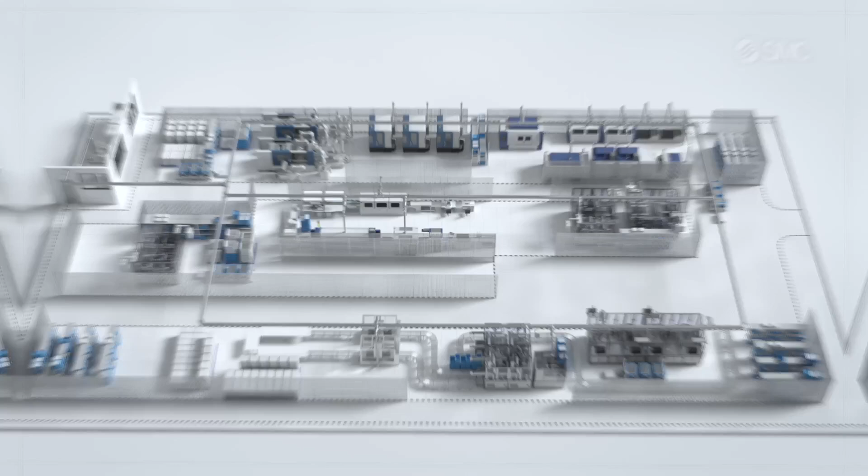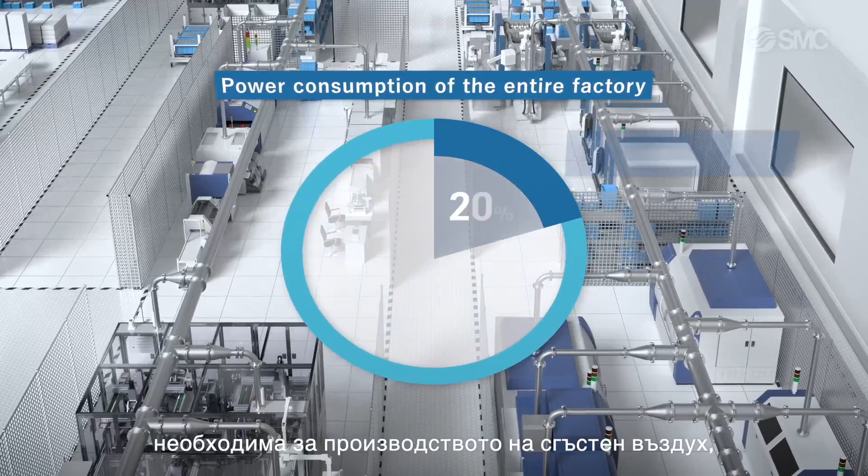Compressed air is commonly used in factories, but its production cost cannot be ignored. The power consumption required for air production is estimated to be 20% of the total power consumption for the entire factory. Conventionally, various measures have been taken to reduce air consumption.

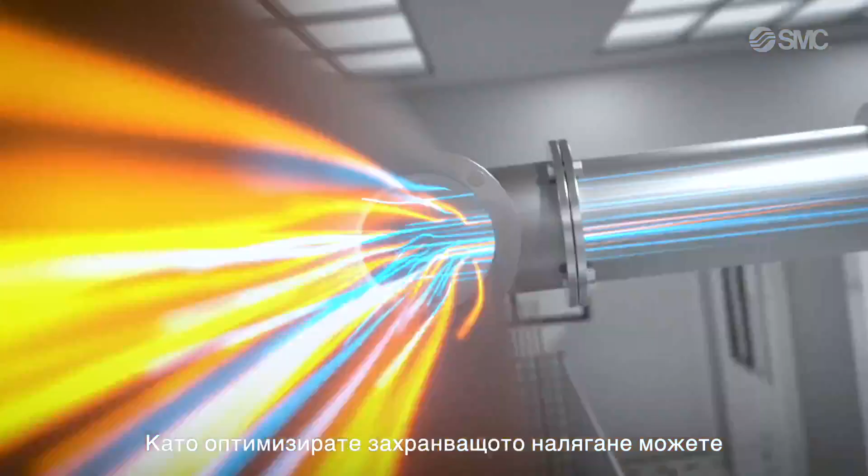However, SMC proposes a method to fundamentally solve the problem by optimizing air pressure. By optimizing the supply pressure, you can save energy and reduce CO2 emissions at your factory, efficiently achieving next-generation air design through best practices. This concept is achieved by 4-bar factory.

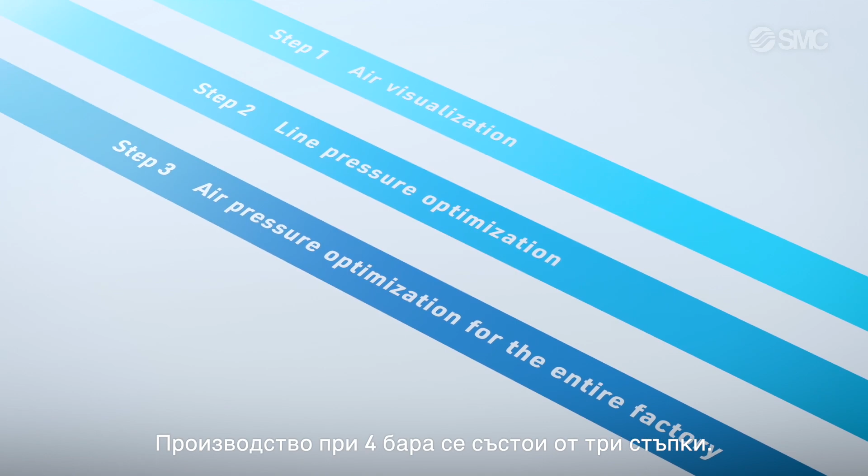4-bar factory consists of 3 steps. Step 1: Air visualization. First, we visualize the pressure and flow rates of existing equipment to identify areas that can be reviewed.

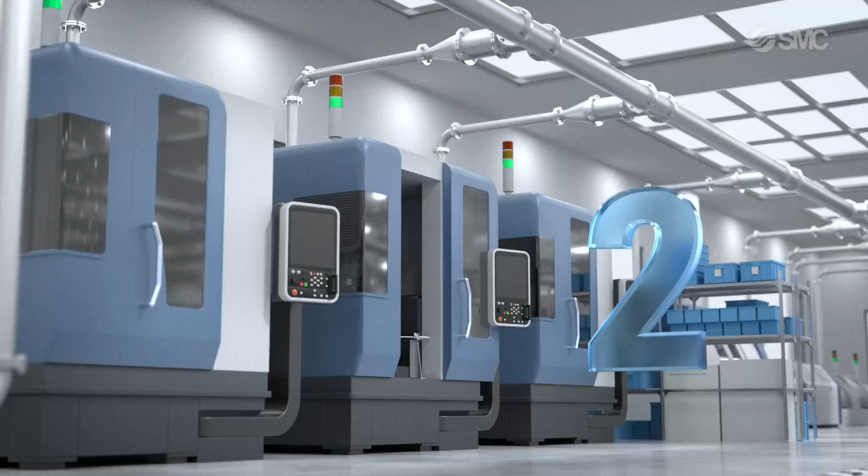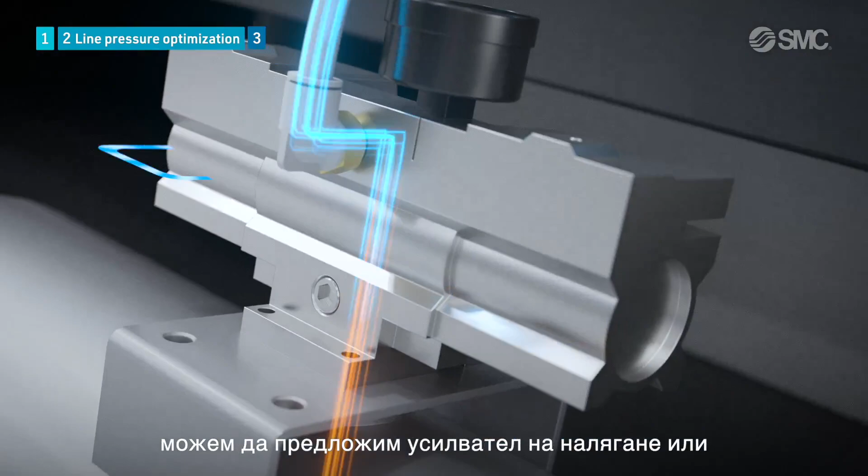Step 2: Line pressure optimization. We verify the air pressure that can maintain production efficiency. In locations where the output must be maintained while the pressure is reduced, we can introduce an exhaust recovery booster regulator, or replace parts with a high-power type cylinder.

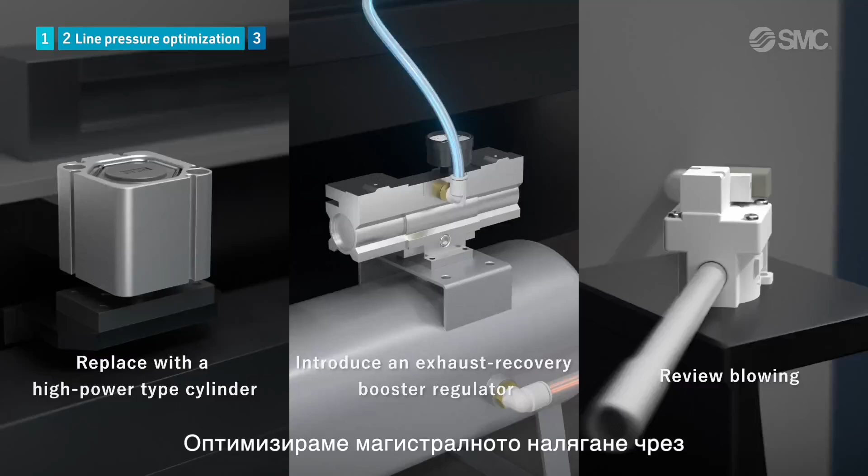In addition, the flow rate of the air blowing system can be improved by utilizing high peak pressure and instantaneous blowing. By introducing optimal products, we optimize the line pressure. This method is applied throughout the factory to optimize the pressure at each piece of equipment.

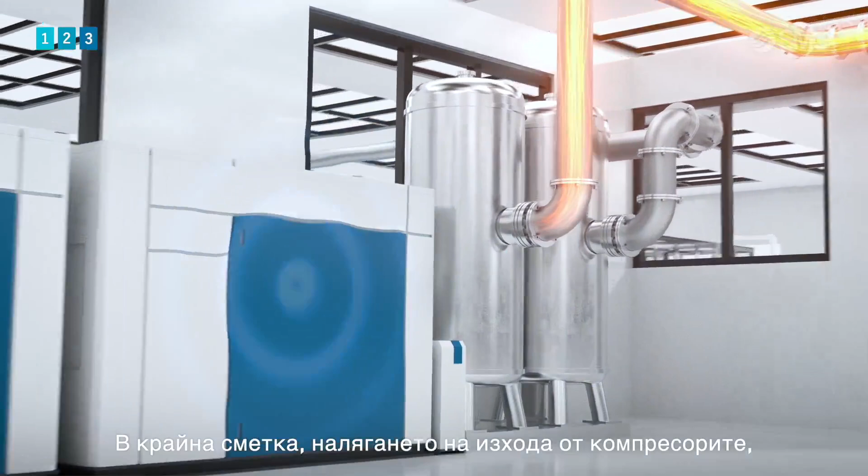Step 3: Air pressure optimization for the entire factory. Lastly, the air pressure for compressors supplying air to the factory is optimized. This saves energy and cuts CO2.

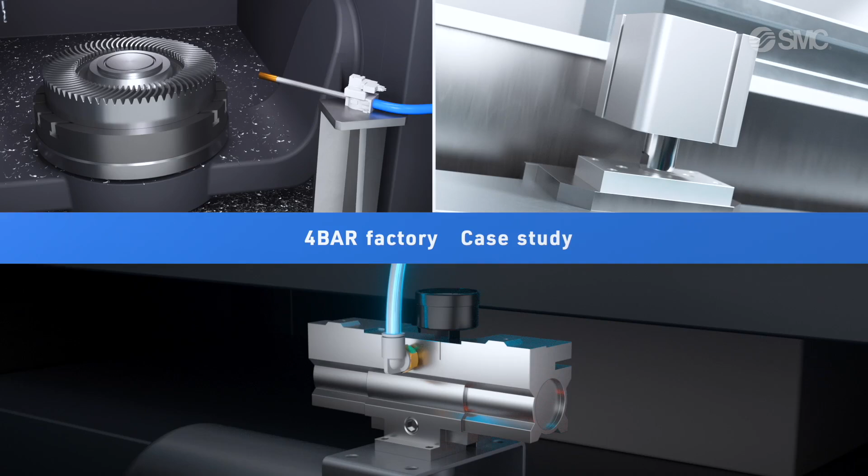Let us look at specific case studies. In machine tools, the air-saving impact blow valve realizes high peak pressure and instantaneous blowing to reduce air consumption.

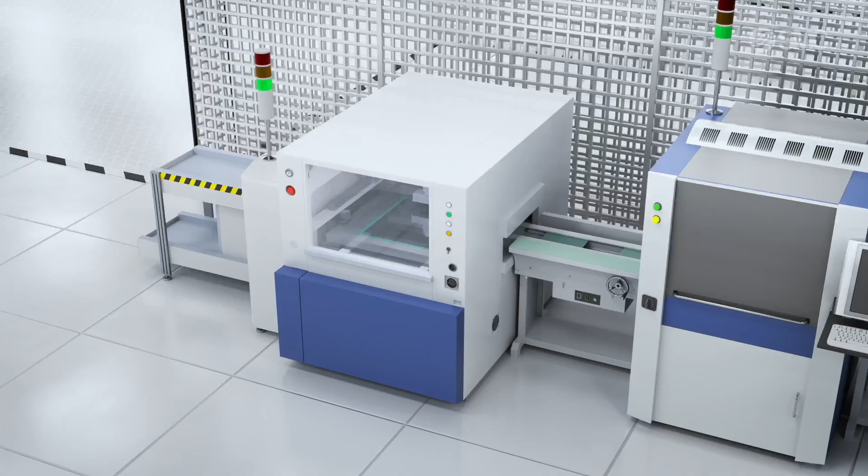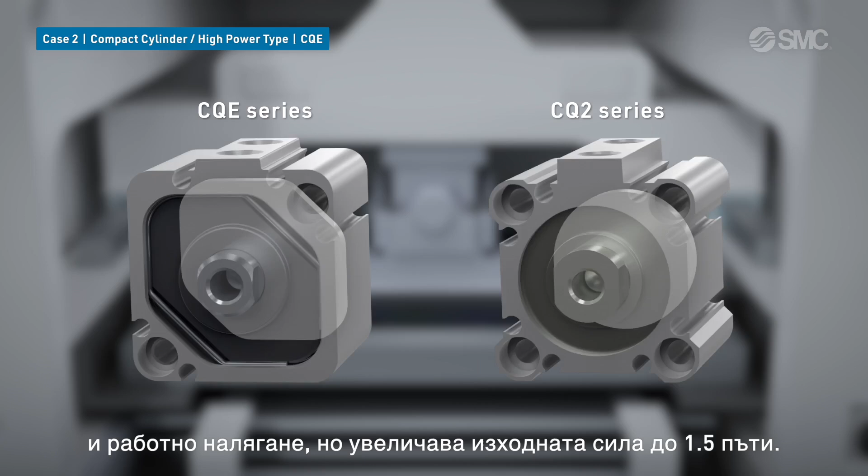With screen printers, replacing existing parts with a high-power type compact cylinder maintains the same external dimensions and pressure but increases output by up to 1.5 times. When pressure is reduced, conventional output can still be achieved.

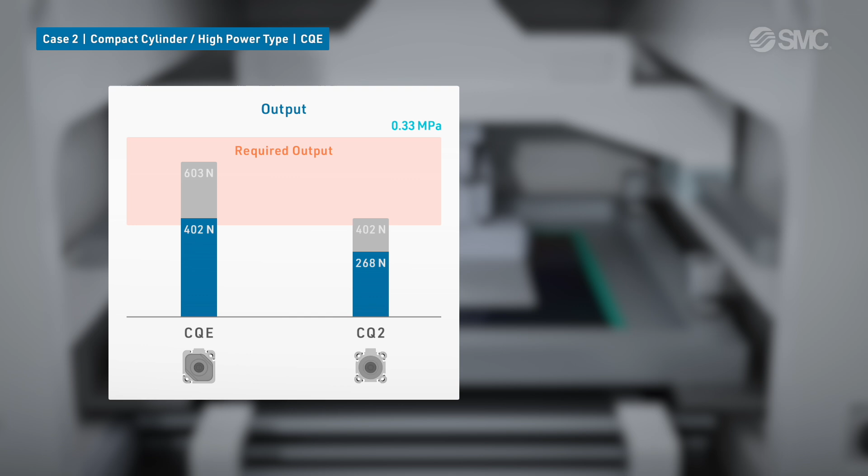With an assembly unit, an exhaust recovery booster regulator can be introduced to locally boost pressure to maintain output.

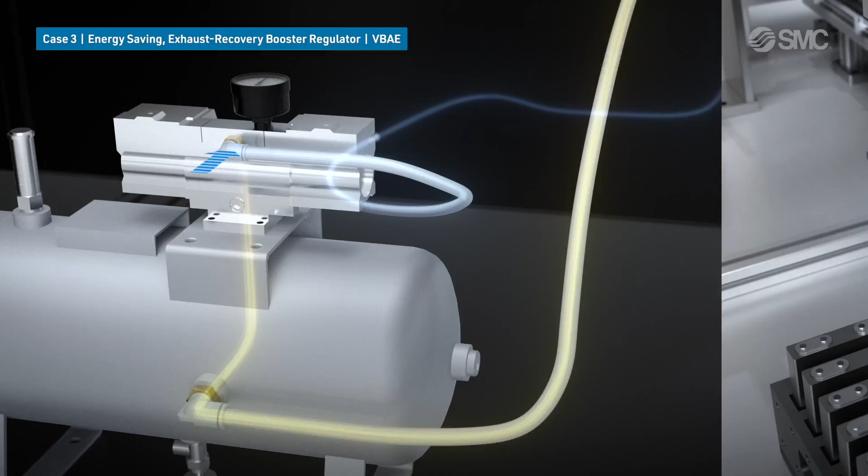The air management system not only visualizes pressure and flow rate, but also reduces air consumption by minimizing or shutting off pressure during equipment standby.

Support system offered by a global network. With locations in approximately 80 countries and regions worldwide, SMC collaborates with local users and equipment manufacturers to help customers overcome challenges from various perspectives.

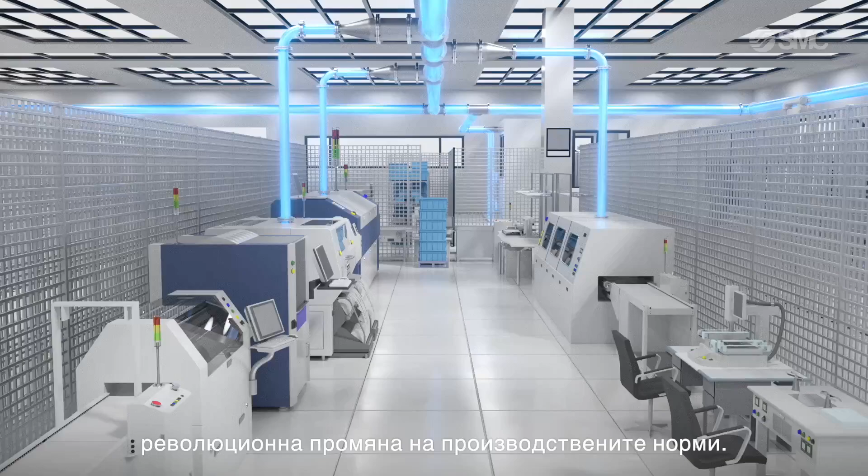4-bar factory offers a choice to revolutionize manufacturing norms. This may become the new standard for the factory of the future.

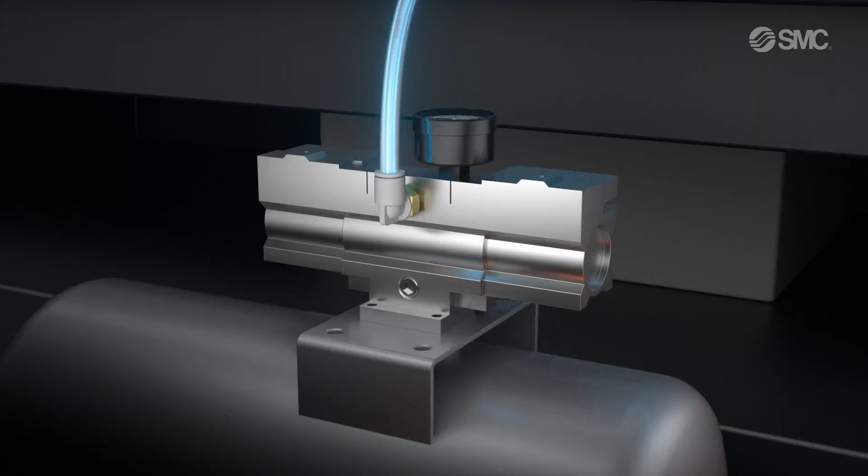SMC proposes and introduces the most suitable equipment for its customers, thereby optimizing air pressure and reducing air consumption. This contributes to cost reduction in the factory. Change the pressure to change the future.